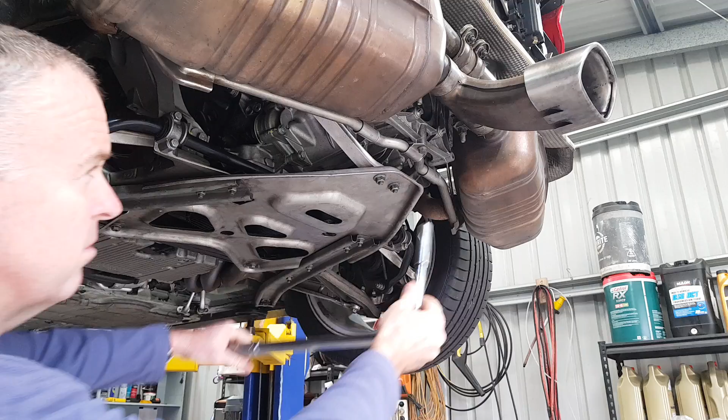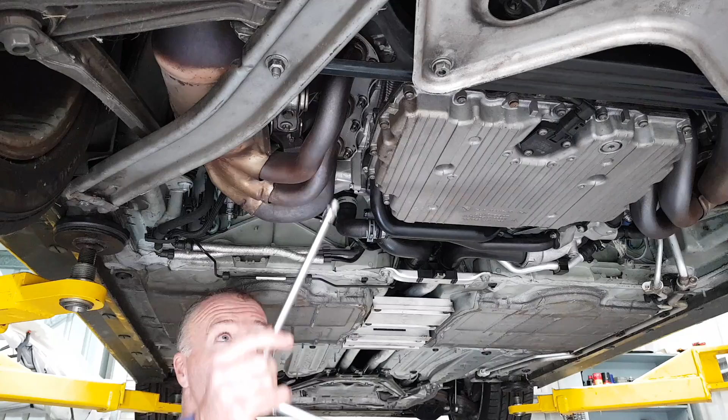A torque wrench is an essential tool for the mechanic, either professional or home do-it-yourselfer. I own 3 of them that I use for a variety of different jobs depending on the torque required. The correct torque is super important, not just to ensure it's tight enough and won't come loose, but also to stop it being over-tightened with the risk of screw breakage or the stripping of threads.

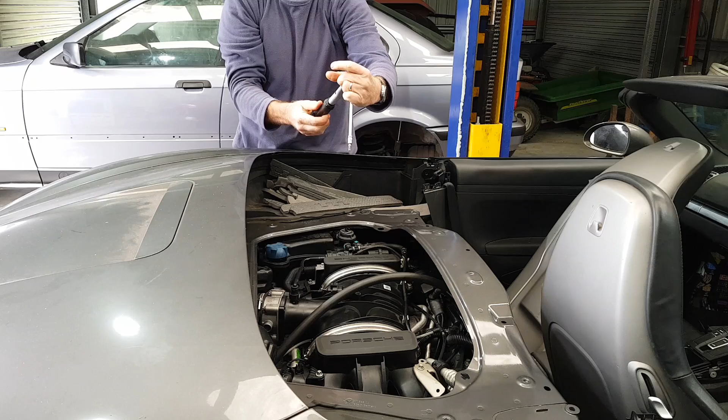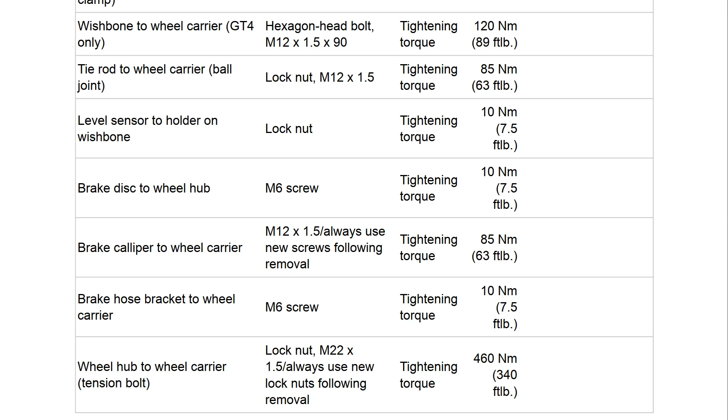Just watch someone get angry at themselves when they strip out the thread of an alloy engine block or snap a screw in an inconvenient location because they didn't apply an accurate torque. But here's the problem. A traditional torque wrench can't be used in all situations. The thread might be left hand, or the torque value too high, or you can't get access to the fastener with your torque wrench. What I'm going to show you is a single tool that costs less than $10 that will work for all of these situations.

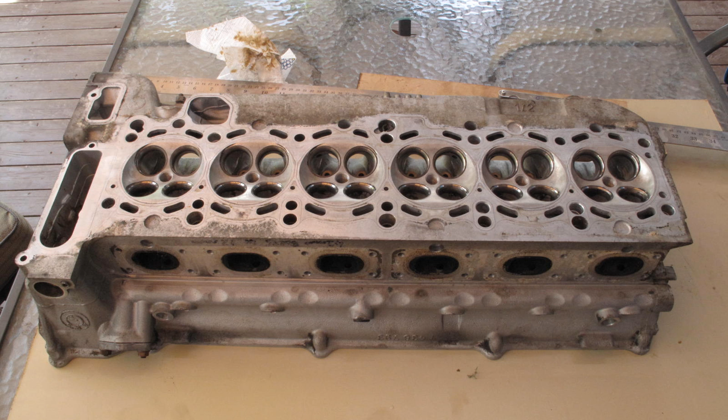It will torque a fastener every bit as accurately as a traditional torque wrench, and I've been using one for years. In fact, I rebuilt an entire engine and automatic transmission with it when I was living overseas years ago when most of my tools were at home and I couldn't source a torque wrench. So what is this amazing tool? Just some digital luggage scales.

And in this video, I'm going to show you how to use one of these to apply an accurate torque to pretty much anything. You can even use these to check and calibrate your traditional torque wrench. It's not a replacement for a traditional torque wrench because those work well and are really convenient, but these scales are a great thing to have in your toolkit when a traditional torque wrench just won't work.

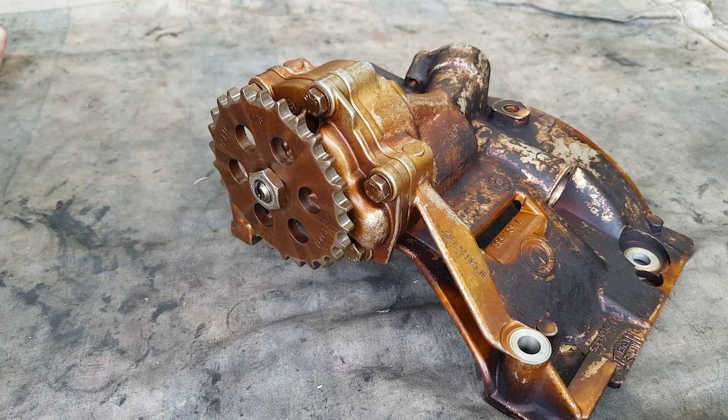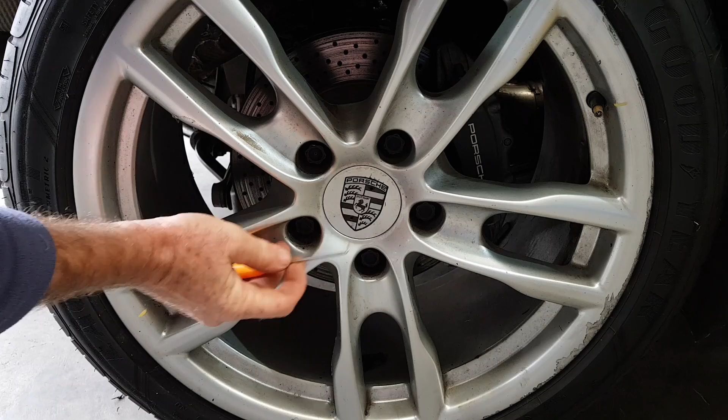Here are some examples. This BMW engine oil pump nut is a left-hand thread, and if you get the torque on this wrong, it's going to really spoil your day when the oil pump sprocket falls off, which is something that has happened a lot on these engines when rebuilt. The axle nut on this Porsche needs 460 Newton meters, which is way beyond the capability of my largest torque wrench. A torque wrench of this capability is super expensive and you'd rarely use it.

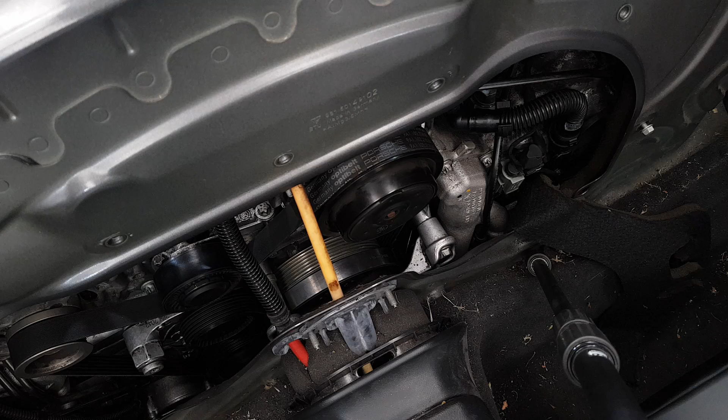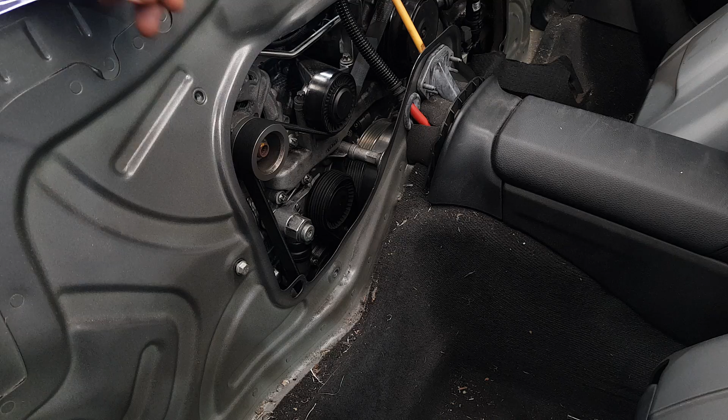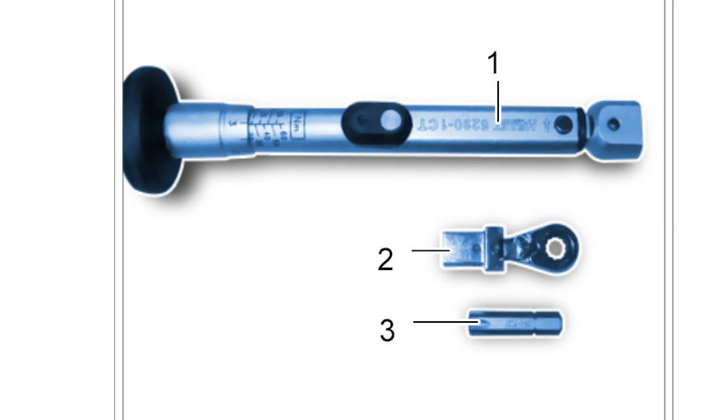The engine mount bolts on this Porsche engine have limited space that only allows access with a ring spanner. The Porsche solution to this is to remove the whole engine from the car to gain access. Well, not for me with my luggage scales. And this belt tensioner bolt on the same Porsche engine only allows access with this small T50 Torx fitting, and there's no way I can get a torque wrench in there. The Porsche solution is a detachable fitting that goes onto a bespoke torque wrench, which is something I definitely don't own.

So, what do most of us do when we're faced with a problem like this? Well, we generally just use the old German torque setting, Gutentight, which is just a nice way of saying we guess. Unfortunately, this isn't very accurate and can have you create a huge problem for yourself if you can't use something that can torque it accurately. Here's an example of using Gutentight and getting it really wrong.

Someone contacted me recently who had a mechanic replace this tensioner I showed you and broke this bolt due to not having the equipment or knowledge to torque it correctly. They then attempted to drill it out by cutting through the chassis and butchered the whole thing and still didn't get it fixed properly. If you took it to a Porsche dealership to have it fixed, they would remove the engine from the car to get access to the parts so this mess could be sorted. I hate to think of how many thousands of dollars would be wasted here.

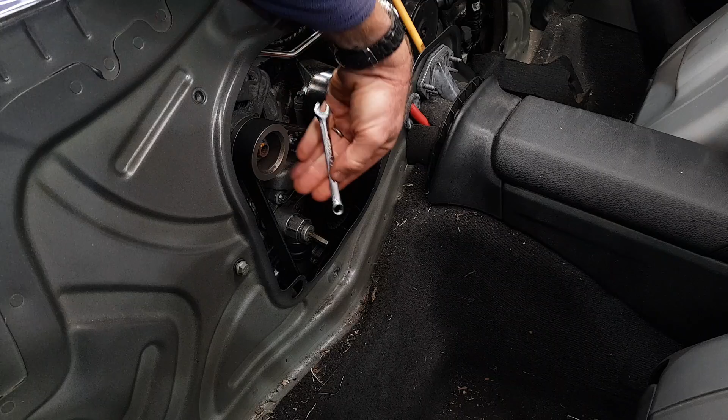And the sad thing is, it's so simple to avoid this sort of thing. As long as you can get some sort of tool onto the fastener, you can use these luggage scales to accurately and easily torque it every single time. Before I show you how to use the scales, I'll explain a little bit about torque, which is essential understanding prior to using the scales as a tool. Also be warned, this will require some very basic maths.

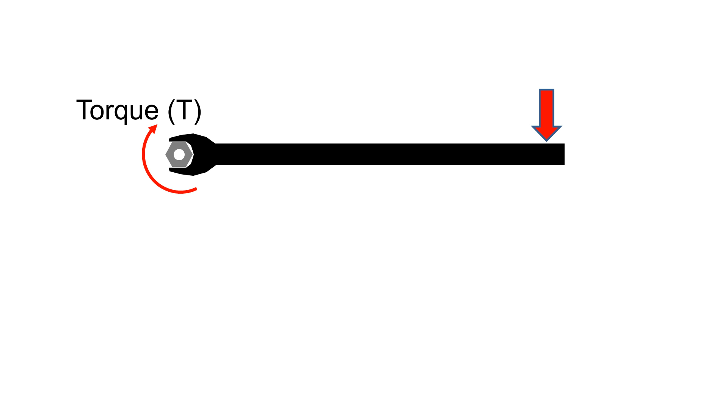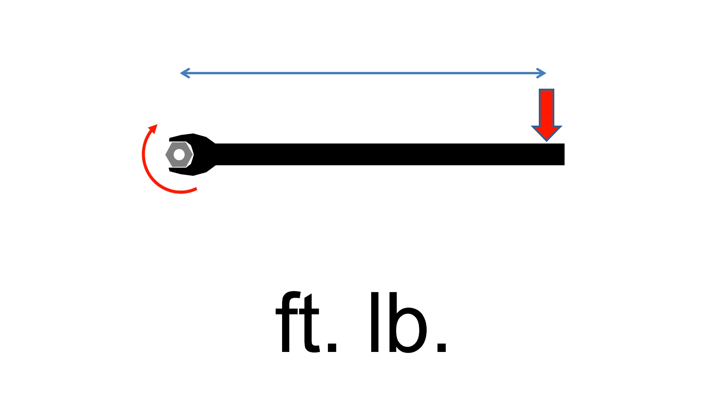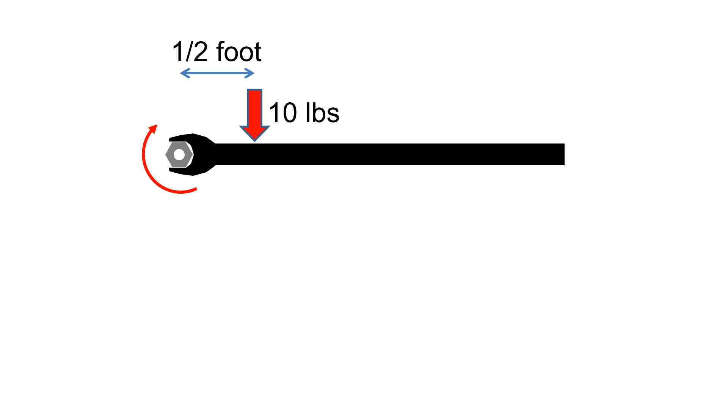Torque is a force that causes something to rotate. The amount of torque is the multiplication of the force applied and the distance from the rotation point where this force is applied. So torque equals force times distance. For example, here is the bolt I'm tightening, and I'll look at the torque unit of foot-pounds first, as this is simpler than Newton meters, which I'll describe afterwards. If I apply a force of 10 pounds at a distance of 2 feet, then I'm applying 20 foot-pounds of torque. If I apply that same 10 pounds of force but at a distance of half a foot, then the torque applied is 5 foot-pounds.

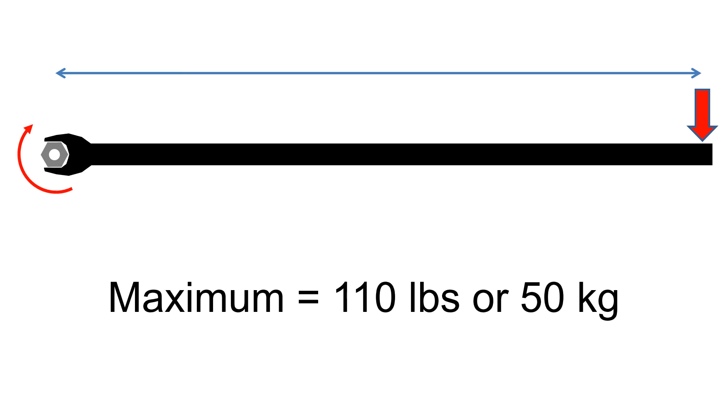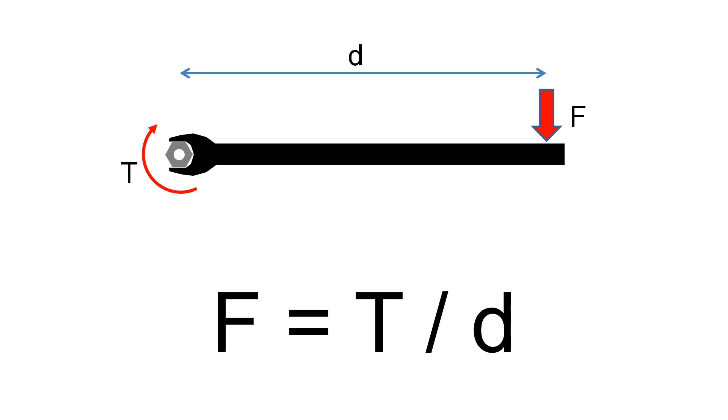And if I apply a force of 100 pounds at a distance of 5 feet, I'm applying 500 foot-pounds of torque. Note that all these are within the capability of my luggage scales, which is good for up to 110 pounds or 50 kilograms. So to work out what force I need to apply for a specified torque, I simply rearrange the torque equation. The force required is equal to the torque divided by the distance I'm applying it. An example, I need to apply 15 foot-pounds of torque, and I'm going to apply this at a distance of 1 foot. I divide 15 by 1 to get 15. So I need to apply 15 pounds of force using the scales at a distance of 1 foot.

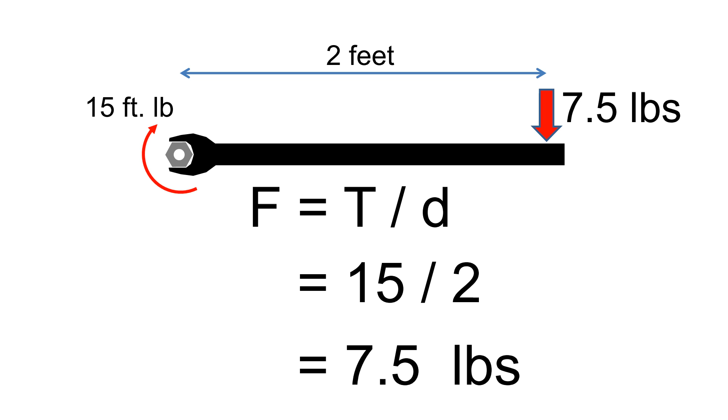If I want to apply the same 15 foot-pounds of torque but at a distance of 2 feet, I divide 15 by 2 to get 7.5. So I only need to apply 7.5 pounds with the scales at this distance of 2 feet. If I want to apply 300 foot-pounds of torque and I intend to apply the force at a distance of 3 feet, then 300 divided by 3 is 100 pounds of force.

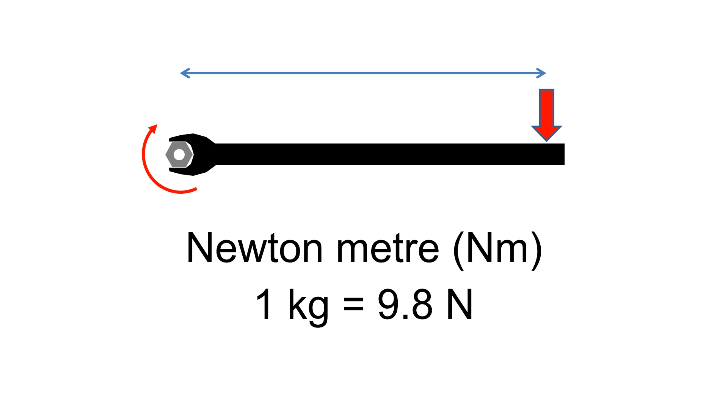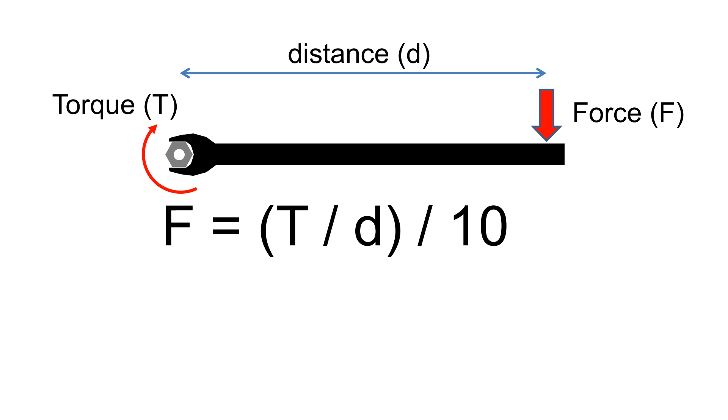When talking Newton meters, there is just a small change to the torque equation. A Newton meter, as the name suggests, is the torque where 1 Newton of force is applied at a distance of 1 meter. So what is a Newton? If you really want to know, do an internet search, but basically 1 kilogram is the equivalent of 9.8 newtons. And if you're like me, 9.8 is close enough to 10. So the equation of force equals torque divided by distance simply needs to be divided by 10 to get the number of kilograms you need to apply. I'll do a few examples to explain.

If I need to apply 23 Newton meters and I'm going to apply this at a distance of 30 centimeters or 0.3 meters, the Newton force I need to apply is 23 divided by 0.3, which equals 76.6 newtons. To get the kilograms, I divide this by 10, which is 7.6 kilograms. So in summary, I would need to apply 7.6 kilograms of force at 30 centimeters to achieve 23 Newton meters of torque.

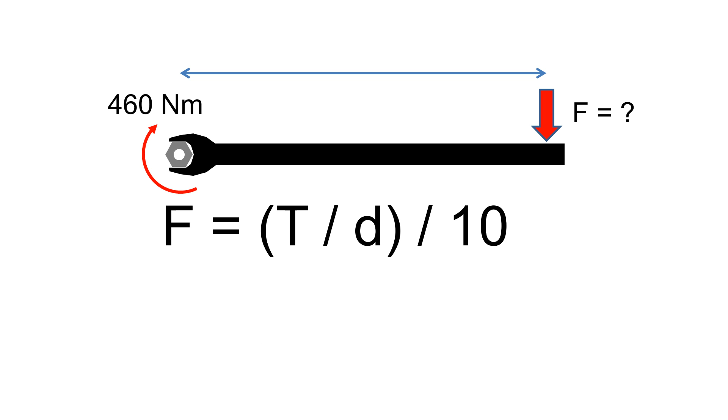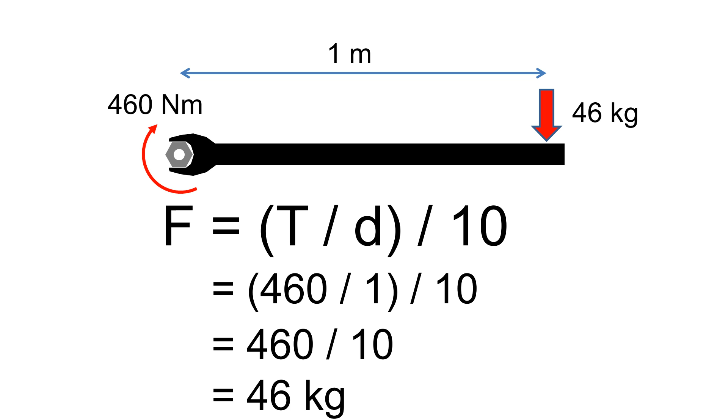Looking at my earlier example of applying 460 Newton meters to the wheel axle nut, I'm going to apply the force at a distance of 1 meter. 460 divided by 1 is 460 newtons. Divide this by 10 and you get 46 kilograms of force. As long as you understand the concept, you can apply the correct torque to any fastener as long as you can get a tool of any kind onto it.

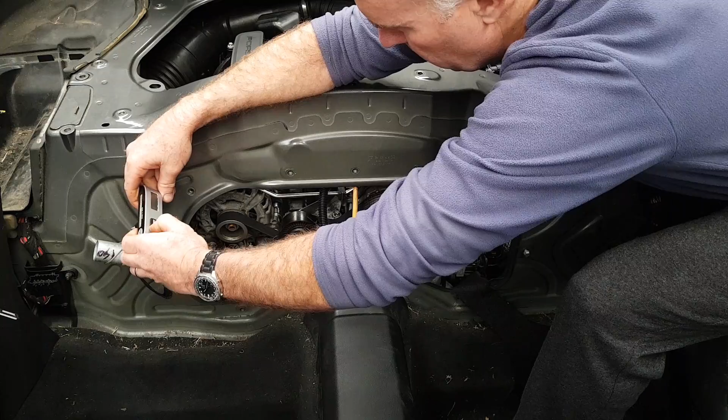Set it up, zero the scales, apply the force with the scales at 90 degrees to the lever using a smooth pull. You will notice the readout slowly increase, and then you can simply stop pulling when the scales read what you need. Perfectly torqued and no stripped threads or snapped screws.

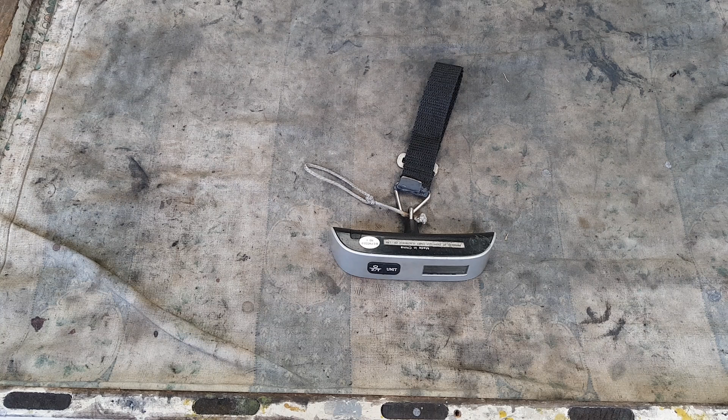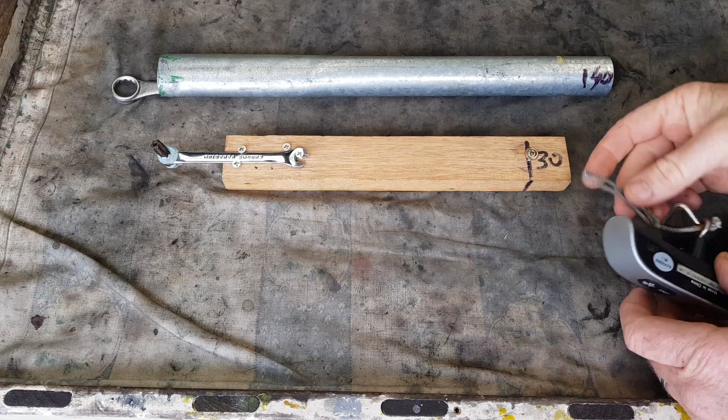The scales I have come with a wide strap that I sometimes use, but I've also attached a piece of rope with a loop that will give you a more accurate position, which is useful for small torque settings. I often will attach a screw or something to the lever that makes it easier to attach the rope, or I simply put the loop around the lever after marking the correct distance location.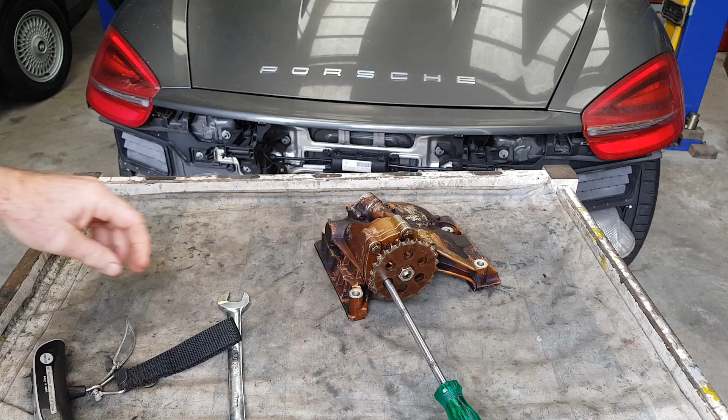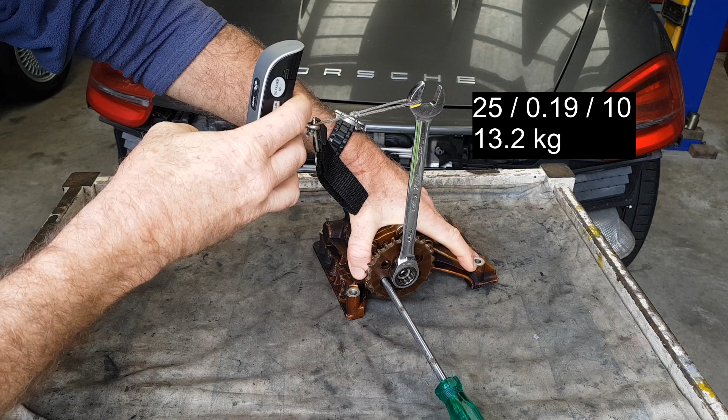So here are some practical examples of how I would use this on a car. If a left-hand thread, I'll simply measure the distance to where I'm going to apply the force using a standard tool and then apply this turning anti-clockwise. That left-hand oil pump nut needs 25 Newton meters, and I'll use a standard ratchet ring spanner and hook the rope onto the other end. The distance to where I'll hook up the rope is 19 centimeters or 0.19 meters. 25 divided by 0.19 divided by 10 is 13.2 kilograms of force.

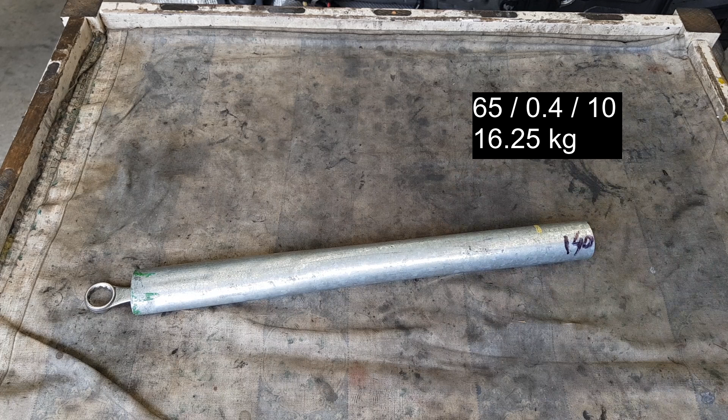For the engine mount screw, where I can only fit the ring spanner, I have a piece of pipe I've squashed in a bit in a vise so that it jams over the top. This line is at 40 centimeters and I need 65 Newton meters. 65 divided by 0.4 equals 162.5. Divide by 10 and I need to apply 16.25 kilograms at this distance of 40 centimeters. To think that Porsche have in their workshop manual to drop the engine to torque this correctly is crazy. All 4 of the engine mount screws I can easily torque like this.

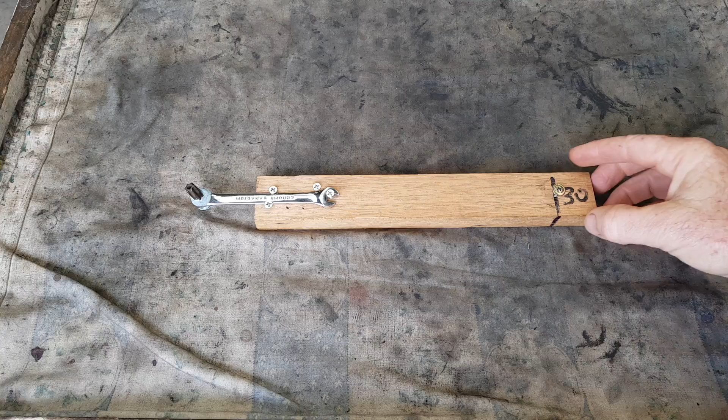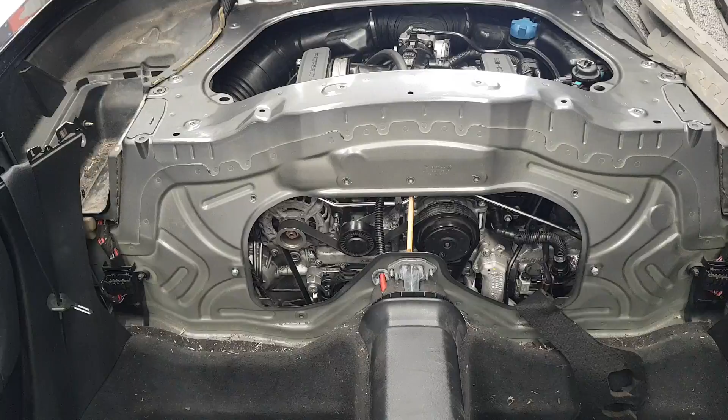For the tensioner screw that needs 28 Newton meters, I have this piece of timber that I screw an 8mm ring spanner to. I use a bit of Blu Tack to hold the Torx piece in place, and I've marked the timber at 30 centimeters and put a screw here to hook up the scales. 28 divided by 0.3 divided by 10 equals 9.3 kilograms of force. Dead easy.

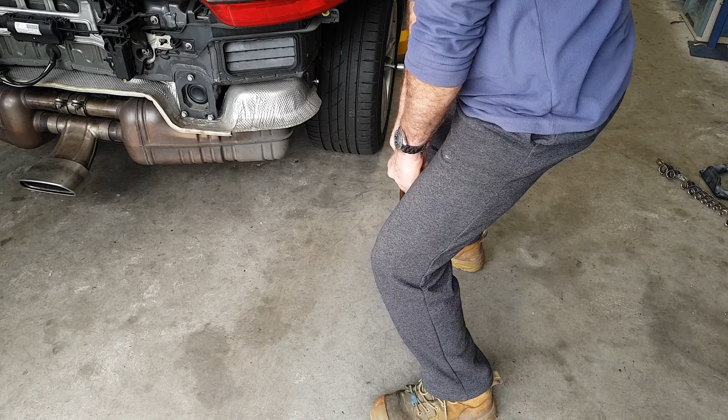That 460 Newton meter axle nut is simple. I use a 1 meter long square pipe over a breaker bar and just pull to 46 kilograms. You can get really creative depending on what you need to do. I've used a lever of 2 meters long at times on my old tractor. And the nice thing about modern digital scales is that they are surprisingly accurate and well within the tolerance specs of a normal torque wrench.

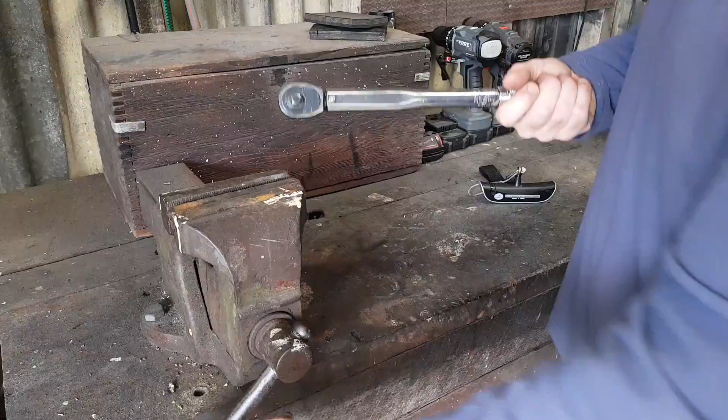You can check how accurate they are by checking the output against a known weight. It's also dead easy to check how accurate your traditional torque wrench is. I've done this loads of times and even used this to calibrate my torque wrenches. Simply measure the distance from the square drive to where you intend to apply the force, put the square drive in a vise, work out how much force you expect to apply at the scales at the torque setting you've set on the torque wrench, and then pull with the scales until it clicks.

Did you get what you expected? Maybe a recalibration is needed, which is done using the same technique. It's dead easy to check the wrench using lots of torque settings to confirm it's working throughout the full range. A good torque wrench will be accurate everywhere. A cheap one is probably not going to be accurate throughout, which is a really good thing to know.

I hope you found this helpful, and if it stops a single person from stripping a thread or breaking a screw that could have been avoided, then my mission has been accomplished.